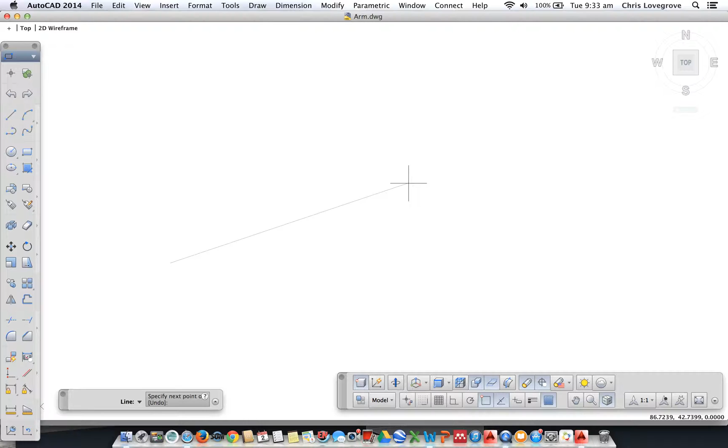So when I draw I pick a line, pick on the screen. You'll notice I haven't got ortho on, so I'll turn ortho on with F8, and the arm length is 133. Enter, enter. Notice how it goes off the screen. So I type in Z, enter, E, enter. With my mouse just zoom out a bit, pan down, carry on drawing, line.

From that end point I'll come up 25, enter, back 133, and to that end point, enter, enter to finish.

Now if I draw a line, this has an end here of 70 degrees, so I'm going to start the line there, and I'm going to type in shift at, in other words from that point I'll put a distance in, let's say 45 mil, and then use the less than symbol to convert it to an angle, type in 70, hit enter, enter to finish.

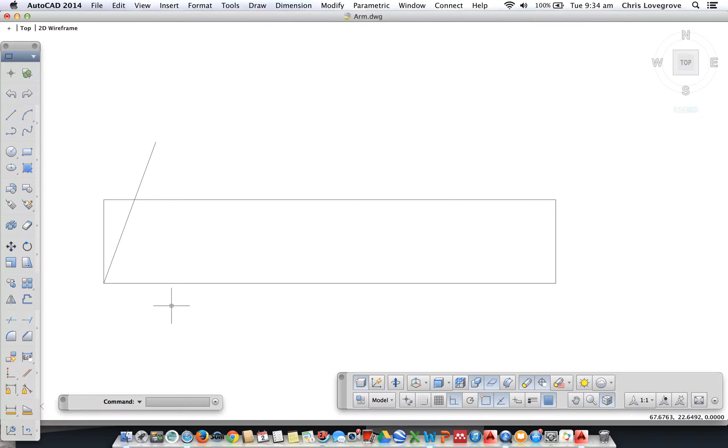So it's drawn a line that long at 70 degrees, and I can use the trim command, pick on trim, right hand click in the black, or the white in this case, pick on the objects I want to trim off, escape, erase that line.

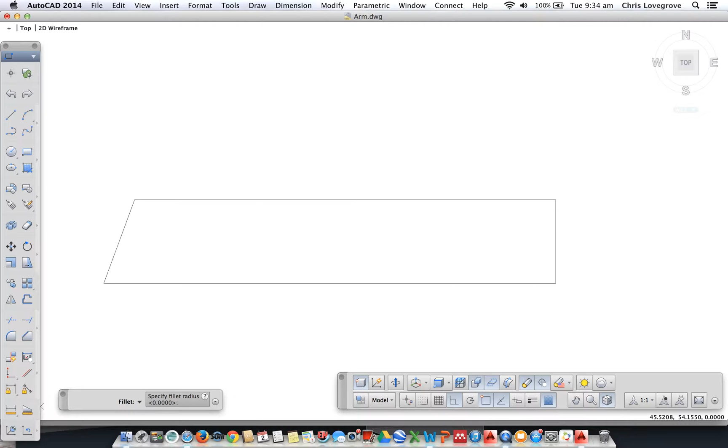Now at this end here I want to do some filleting, so I pick on fillet, for radius, and the radius is going to be 12 mil. Enter. So I pick on the first line for fillet, the second line for fillet, pick on fillet again, pick on the first line to fillet, second line to fillet. It's got a little flat in there, but that's good.

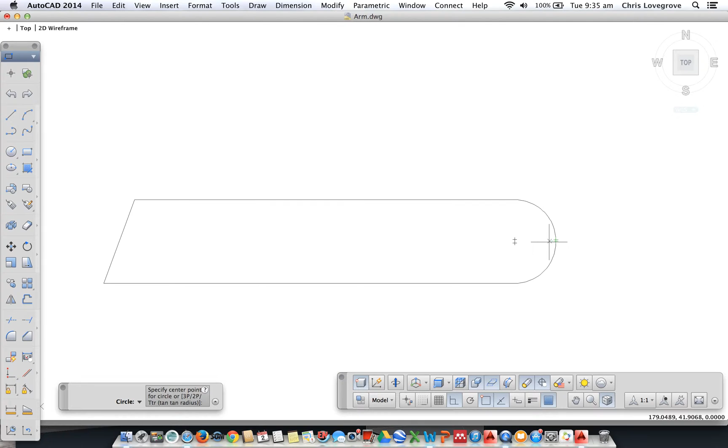Escape. So now I'm going to draw a circle. Problem is that I want to draw a circle from the midpoint there, so hopefully I've got O tracking, and I want to come in here 12.5 mil.

So that's the O tracking center of the circle, and the radius of that is 5 mil, so type in 5.

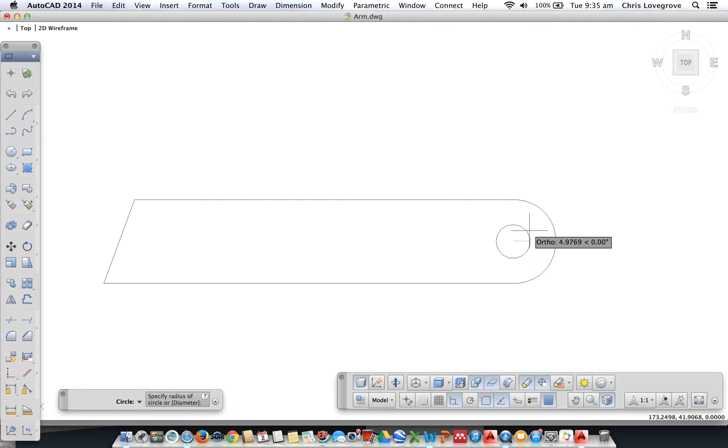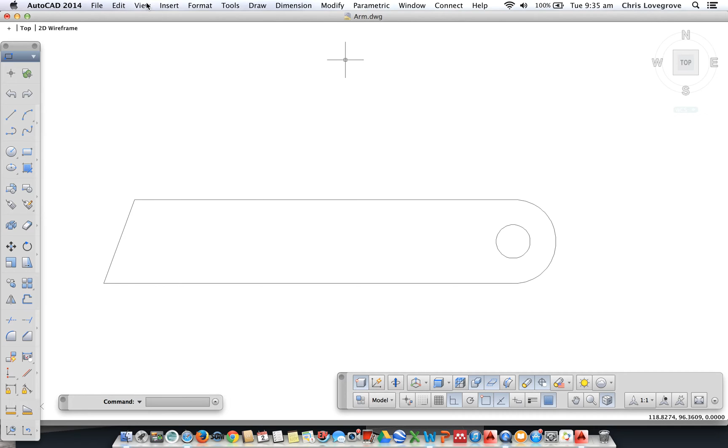Now what I want to do is join all of those and then turn it into 3D. So I type in join, enter, and I'll select those objects and those objects, enter, and in the view, 3D views, I'll go to southwest isometric, zoom out a bit, and then go to 3D modeling.

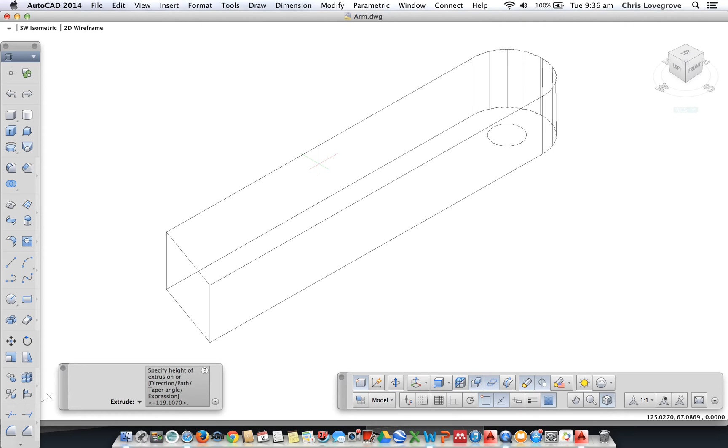In 3D modeling here I can extrude by picking on that object, enter, and I'll come up. I'll fix this, it's 5 mil bar, so 5 mil, and I need to push pull that hole through there.

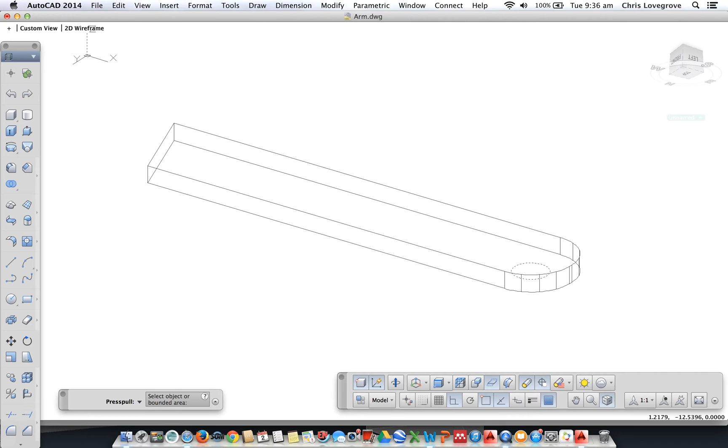So if I go to push pull, I'll have to rotate that, okay, rotate so I can get to that object which is the hole. Now push pull, inside the circle, come up, enter, escape.

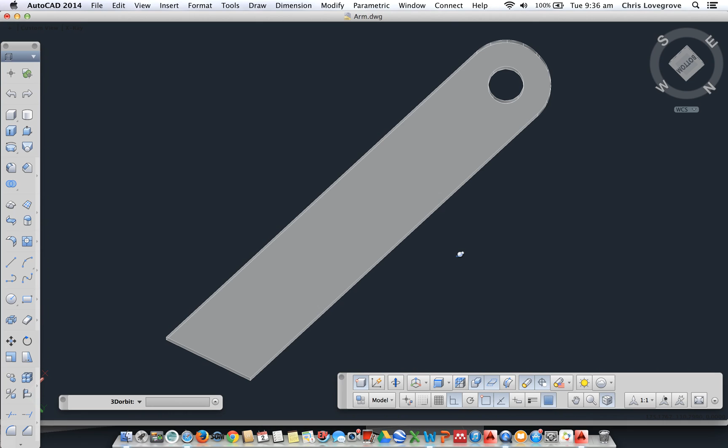If I view it, the view style is X-ray, and then rotate, you'll see there I've drawn this steering arm. So now I'll save that.